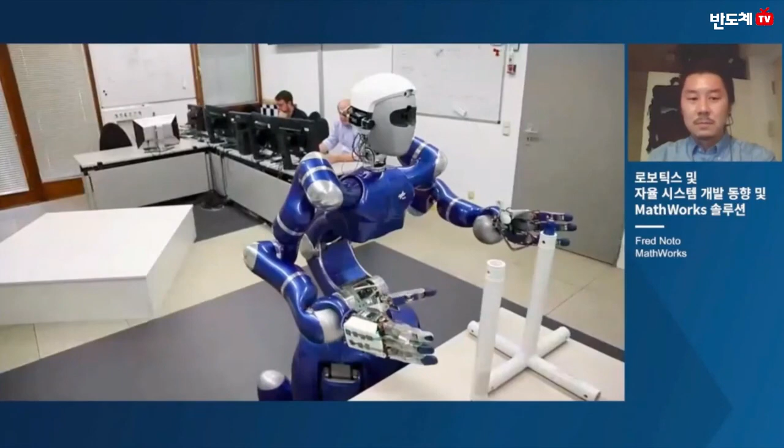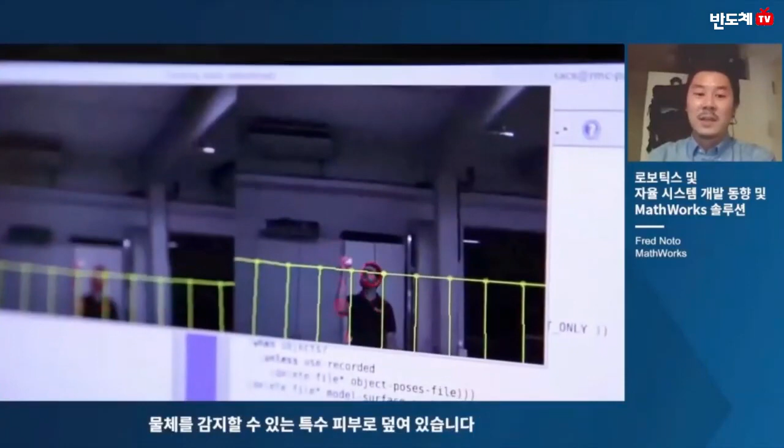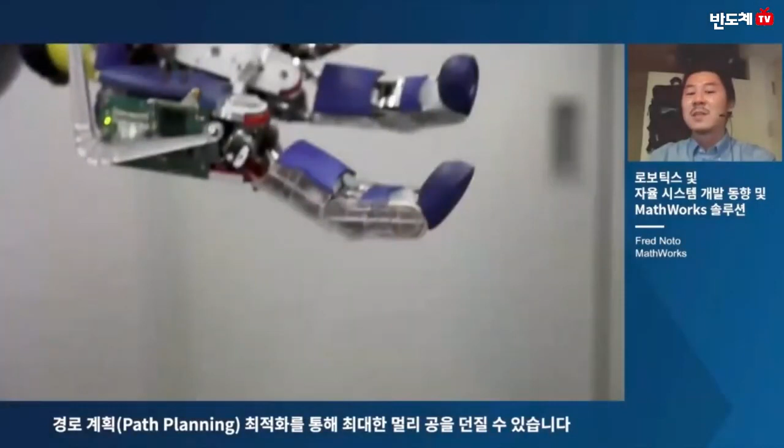I want to begin by showing an example of a highly advanced humanoid robot. This is Agile Justin, an autonomous humanoid robot developed at DLR, the German Aerospace Research Center. He uses stereo vision cameras to see the world and has special skin that can sense objects. Agile Justin can form a point cloud of the room, such as the table and the pipes, then perform human-like tasks such as connecting the pipes. He can perceive objects such as a person or a thrown ball, and he then plans his tasks such as catching or throwing a ball. Optimization methods for path planning enable him to throw the ball as far as possible.

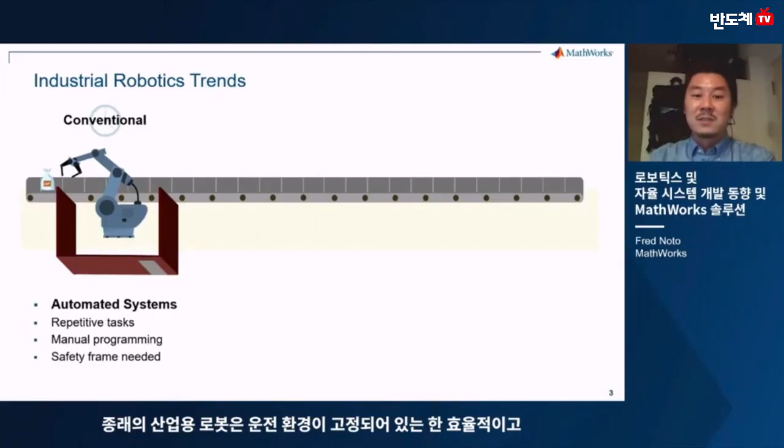So this was a case of a very advanced robot. Now let's take a step back and look at the trends toward intelligent industrial robots. Until now, conventional industrial robots have been mainly used, and these robots can be considered automated systems. They execute repetitive tasks throughout the day and night, and the tasks are manually programmed. They're unaware of their surroundings when in operation, so a safety frame is needed to prevent injuries or destroying objects. The conventional industrial robot is efficient as long as operating environments are fixed, which makes them effective for executing mundane tasks for prolonged periods.

There are many cases of our customers developing these robotic systems. One example is from Ricoh, who used model-based design to design robot actuators, a double motor actuator, which is multi-component and nonlinear. They use physical modeling tools to import 3D CAD data and build high-fidelity models of the complex system. Ricoh engineers were able to build the model in half a day and virtually reproduce the actual hardware characteristics in simulation.

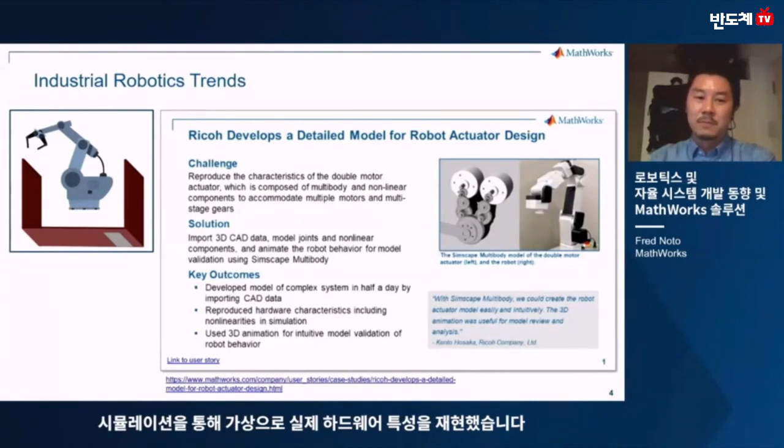In addition is a use case from 3T, who developed a robot emergency braking system for a SCARA assembly using model-based design. They used fixed-point implementations of control algorithms onto FPGA by automatically generating VHDL code. They were able to reduce clean room time from weeks to days, and noted that the time for resolving complex bugs was reduced from weeks and months to only one day.

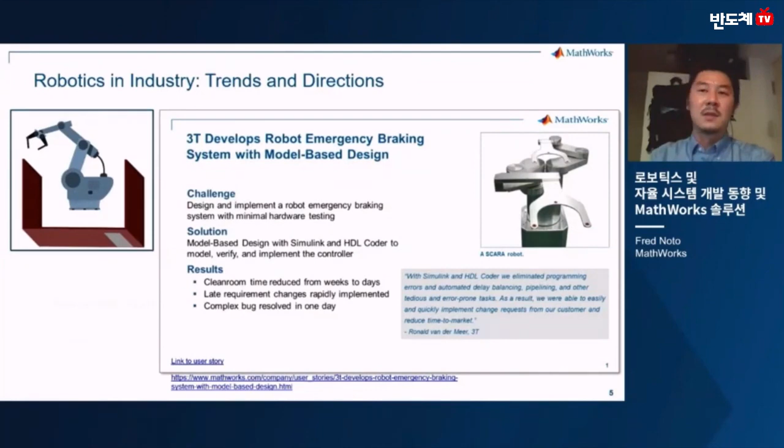Getting back to the trends, in recent days there are various autonomous technologies being applied to industrial robots. This includes algorithms that allow the robots to be more flexible in their execution, and also advanced algorithms that allow the robot to decide on the task being performed. Also, collaborative robots are robots that work while interacting with humans, and are rapidly being developed and adopted due to their agility in adapting to changing work environments.

A recent example of customers developing autonomous technologies with MATLAB and Simulink is from Kyocera, who presented at the MATLAB Expo in Japan last year. They used MATLAB, Simulink, additional toolboxes, and MathWorks consulting services to develop grasping and motion planning applications for collaborative robots. Simscape Multibody was used to build physical models for the robot hand, which were used for detailed modeling and simulation to define optimal parameters to successfully grasp various work pieces. They imported the robot model from URDF files using Robotics System Toolbox, which provided capabilities to interface with ROS. Though the slides are in Japanese, they are available to view on the MathWorks site.

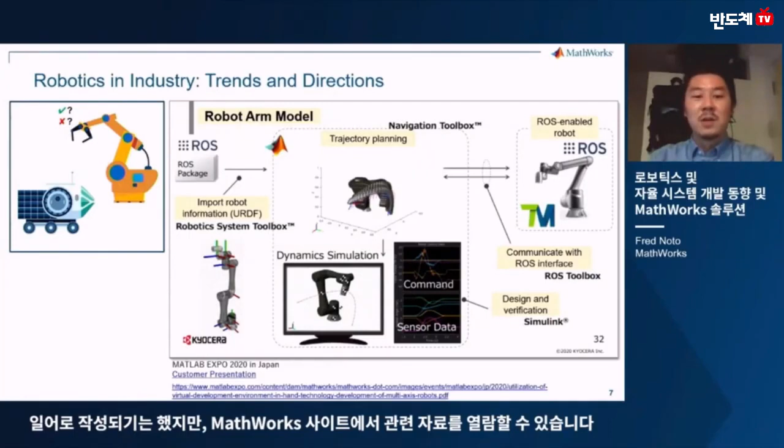Now let's take a step forward. Currently, there is a lot of research and development being done for autonomous systems, and these autonomous systems will be largely utilized in future commercial industries. These autonomous systems will be more agile and adapt to complex environments. More complex robots, such as mobile manipulators and humanoids, may become more relevant in the future. These robots will not only be able to execute a large variety of tasks autonomously, but will also cooperate and share intelligence, in other words data, to optimize and achieve an objective.

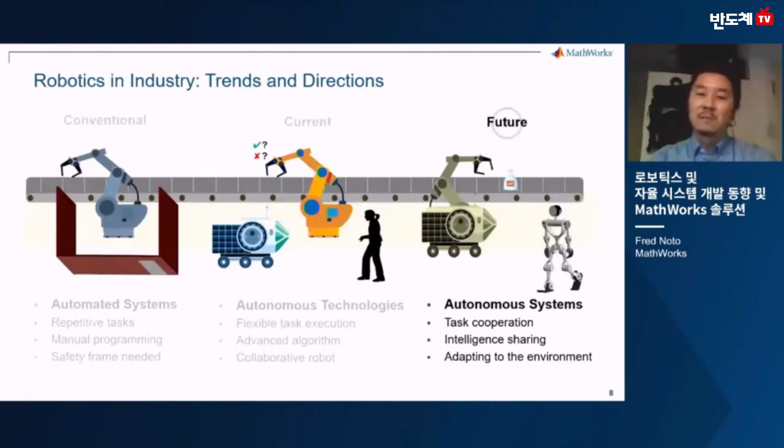An example of complex autonomous robot development with MATLAB and Simulink is again Agile Justin, from the video shown at the beginning of this session. Agile Justin, developed by DLR, the German Aerospace Center, is a humanoid robot with 53 degrees of freedom, and model-based design with MATLAB and Simulink was used in its development. MATLAB and Simulink was used to develop the advanced control, sensor calibration, and path planning algorithms, and Stateflow was used to design task sequences such as for grasping or lifting objects.

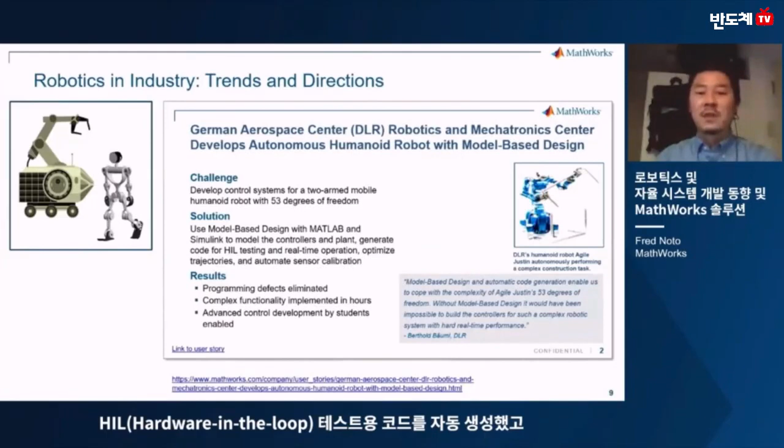They automatically generated code for HIL, or hardware in the loop testing, and the code was also used for real-time operations. Model-based design helped drastically reduce the time for implementing complex functionality, while automatic code generation eliminated manual coding errors and allowed the team to focus on designing their complex systems.

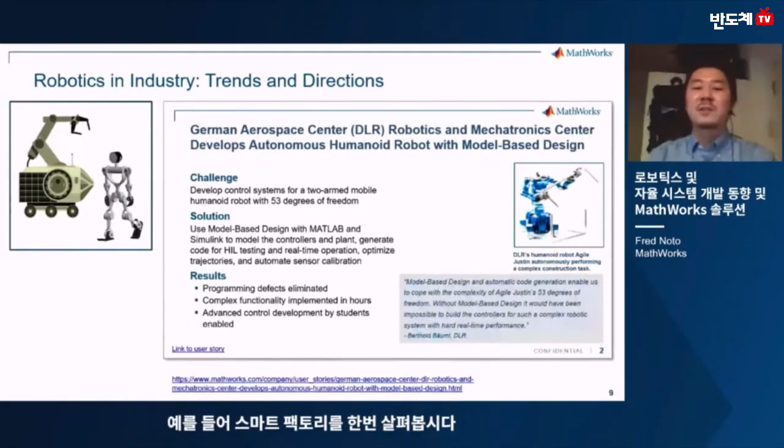Now, we discussed the trends in research and development for industrial robots, but in the bigger picture, robots are a portion of the operational process. For example, let's take a look at a smart factory. In a smart factory, the robots are on the factory floor executing tasks, potentially in collaboration with human workers.

And of course, the data from the robots must be collected, and there is a move towards using local 5G for connectivity and data collection, and this is being researched currently.

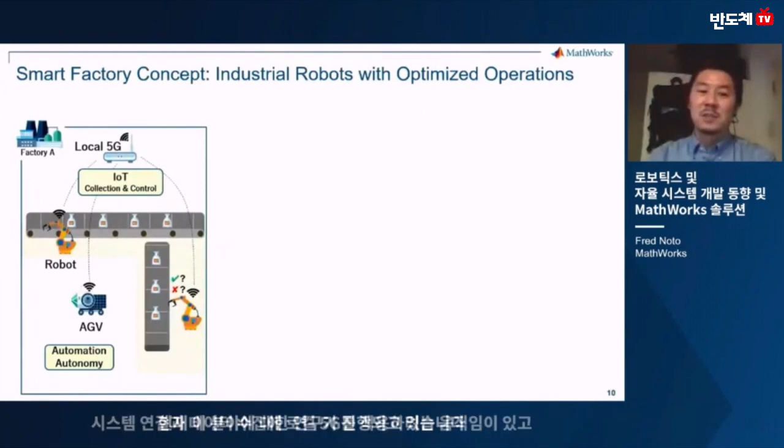The data is then sent to the cloud where AI is used to analyze the big data for predictive maintenance or identifying possible process optimizations. There is, of course, a human on the loop which monitors the operational data through OT systems and provides updates as necessary. Now, this is for one factory, but multiple factories will share data in the future, leading to more data collection and opportunities for improved efficiency.

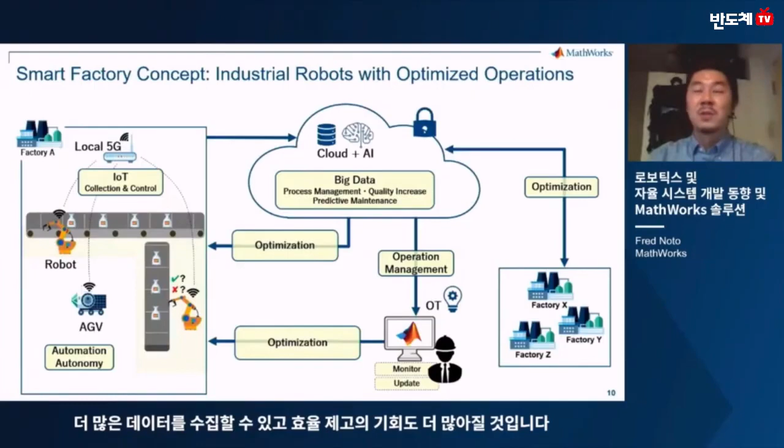Now, MathWorks customers are already developing systems that support this vision. For predictive maintenance, Mondi used MATLAB to develop and deploy operation monitoring and predictive maintenance software, which includes machine learning and allows Mondi to predict machine failures before they occur.

Only 6 months were needed to prototype the system, and the production software runs 24 hours a day, 7 days a week, saving more than 50,000 euros a year.

Krones developed a digital twin of their package handling robot using Simulink and Simscape Multibody for physical modeling. The digital twin model is used for design optimization, fault testing, and predictive maintenance.

Our customers are using MATLAB and Simulink in such ways for developing new robots as well as operational applications.

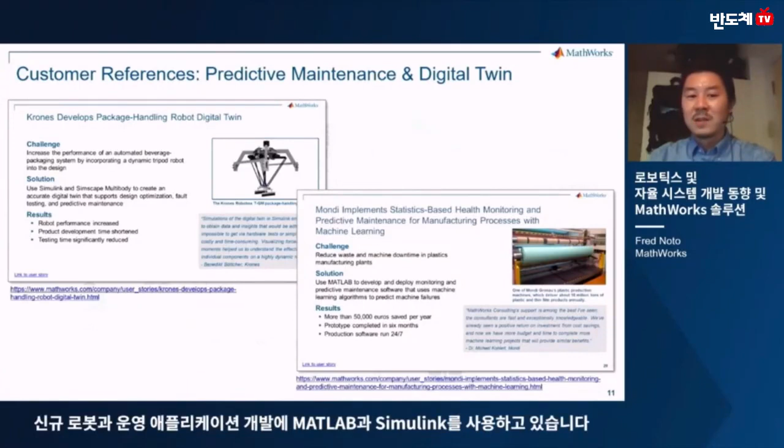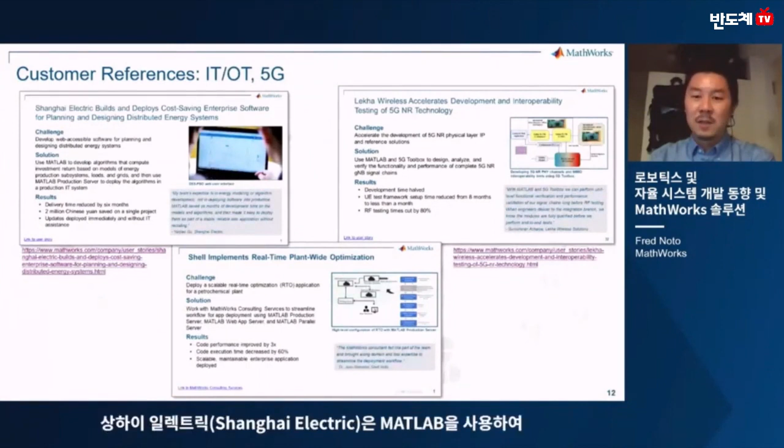On the topics of IT, OT, and 5G, Shanghai Electric used MATLAB to develop algorithms for distributed energy systems and used MATLAB production server to deploy in a production IT system.

Shell used MATLAB to implement a real-time plant-wide optimization application for a petrochemical plant and worked with MathWorks consulting services to deploy a high-performance application.

And finally, Lekha Wireless used MATLAB and the 5G toolbox to develop 5G new radio technology, which will enable data rates 10 times faster than LTE, while ensuring that they comply with specifications.

You can see that MATLAB and Simulink is used for developing a broad range of new technologies.

Now, I want to come back to the autonomous robots and give a simple overview of the development workflow. This will be a brief introduction to some applicable capabilities, but today's upcoming sessions will go into more detail for many of the topics.

When building autonomous robots, it's difficult and oftentimes high risk to build and test directly with hardware. So engineers ask the questions: how can I model and simulate robots? How can I design autonomous algorithms? And how can I perform integrated tests and deploy to hardware?

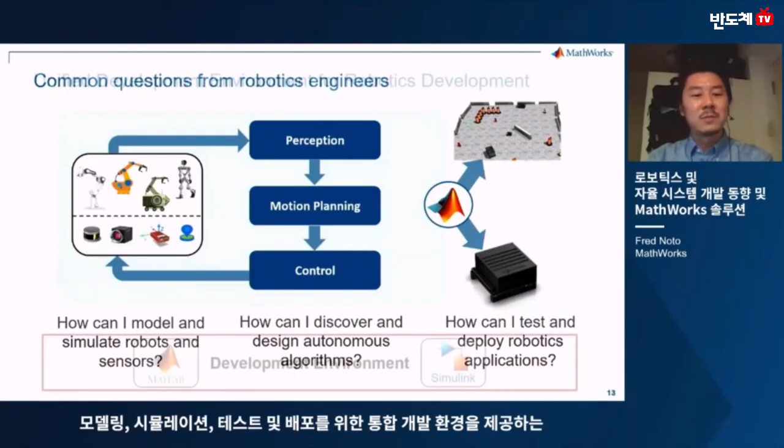Well, you could do this with MATLAB and Simulink, which provides a unified development environment for modeling, simulation, testing, and deployment.

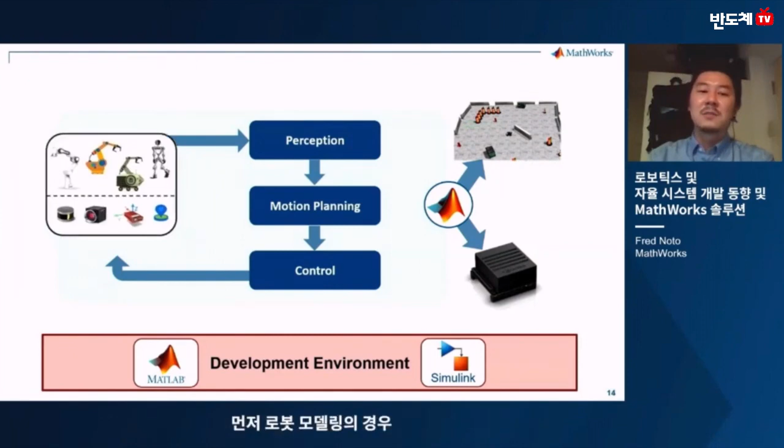Let's first look at robot modeling. MATLAB and Simulink provides capabilities to model and simulate your robots at the fidelity level you require.

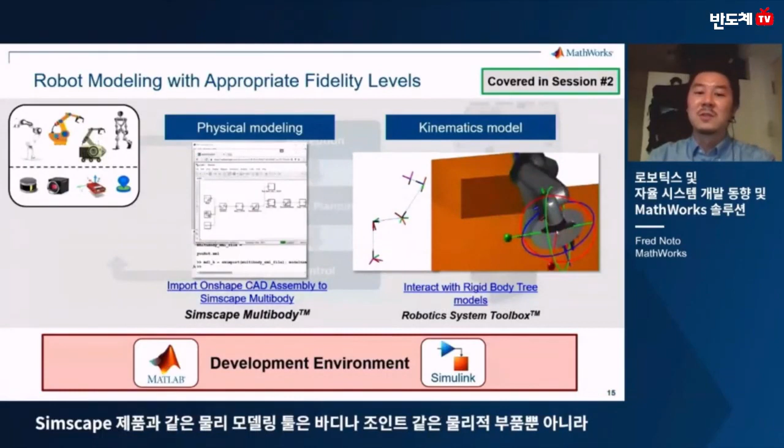For example, developing brand new robotic systems, you may be interested in the mechanical and electrical components that make up the robot. Physical modeling tools such as Simscape products help design your systems using physical components such as bodies and joints, as well as various motor types. You can even import from CAD files to accelerate this process.

If you're focused more on autonomy, you may not need an extremely detailed robot model. You can use kinematics models such as rigid body trees through Robotics System Toolbox. These models allow for faster setup and performance while you focus on developing autonomous algorithms. This topic will be covered in more detail in the next section today.

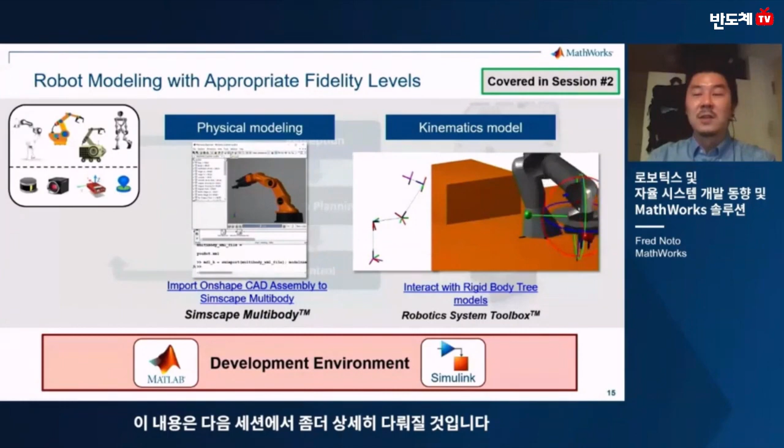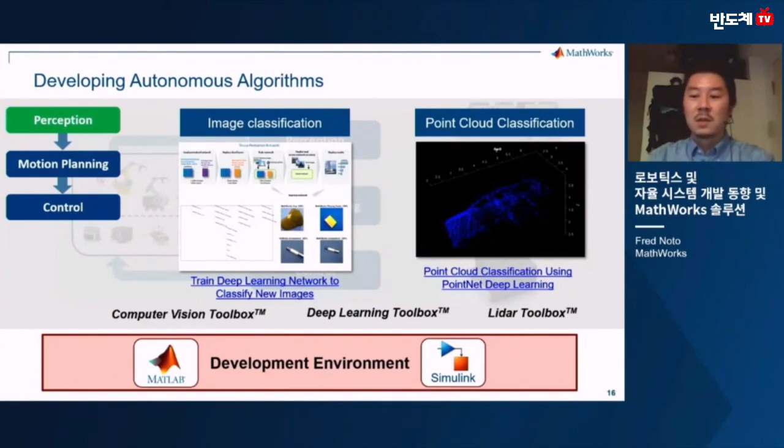For motion planning, industrial robots need to calculate their movements to perform a specific task. To grasp an object, a path is planned, and the robot configuration is calculated to achieve a desired end effector position. Robotics System Toolbox and Navigation Toolbox can be used for motion planning algorithms through forward and inverse kinematics and dynamics, advanced path planners, and even collision checking and detection capabilities.

This will be covered in more detail in session 3 today.

Then, of course, control is needed for execution. For complex applications, scheduling sequences of tasks is often necessary. You can build state transition diagrams or sequence logic using Stateflow. Model predictive control can be applied to generate collision-free trajectories.

And recently, there has been an increase in research and development for the application of reinforcement learning for robot controllers. This will be the topic of focus in session 4 today.

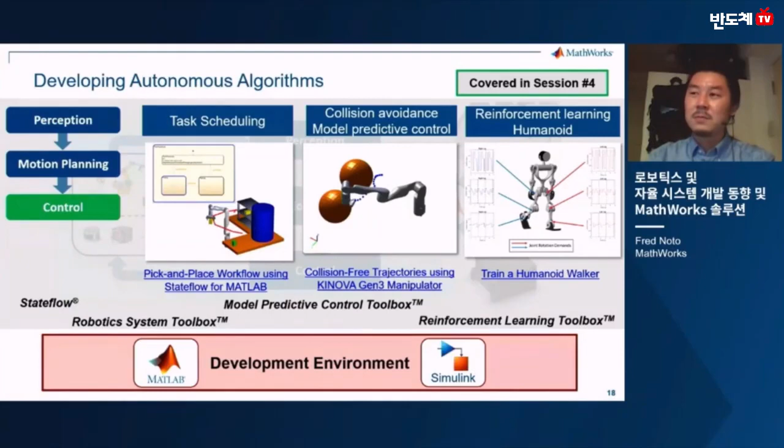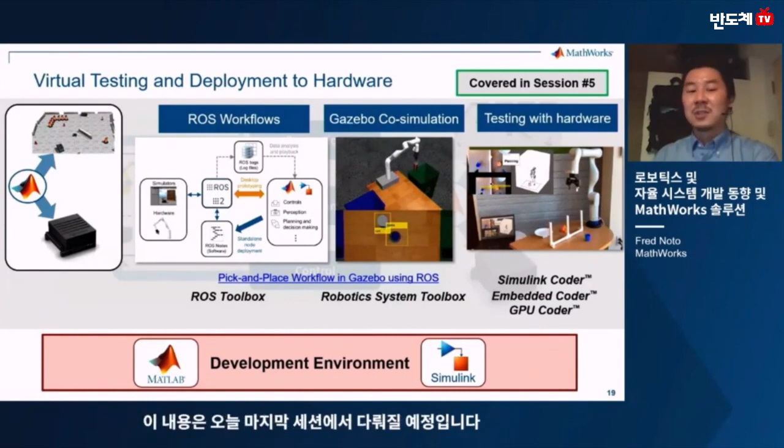So that was a brief introduction to the workflow for developing autonomous industrial robots. You can use model-based design with MATLAB and Simulink to model and simulate robots, develop autonomous algorithms from perception, motion planning to controls, integrate these components together, and test virtually, and finally, automatically generate the necessary code to deploy to your hardware.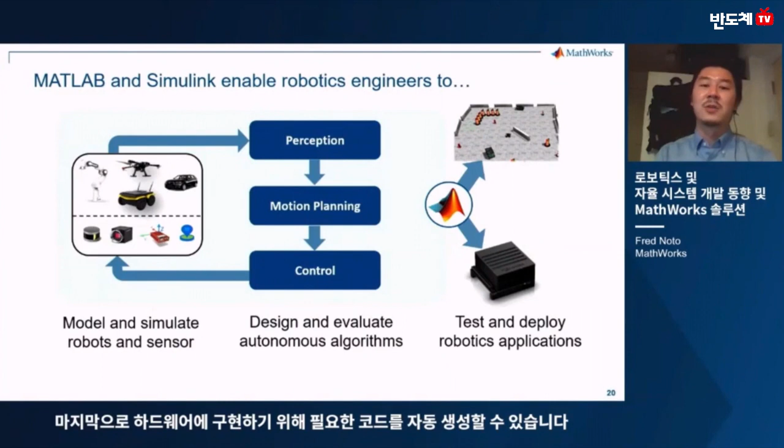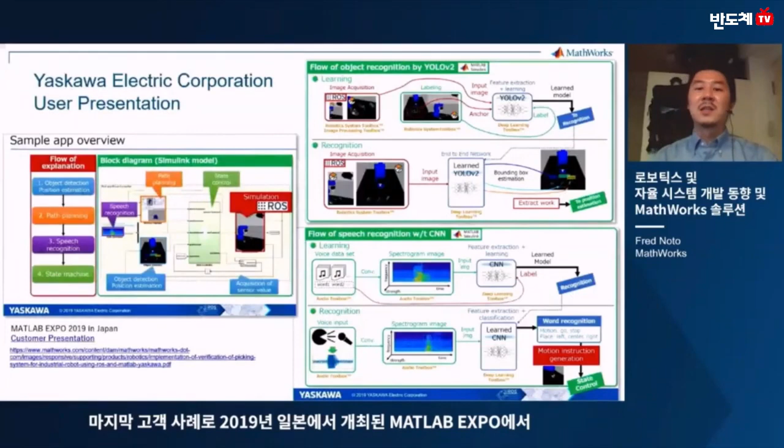As a final use case, I want to share a customer presentation by Yaskawa Electric Corporation from the 2019 MATLAB Expo in Japan. This was for developing a sample application for autonomous manipulator operations.

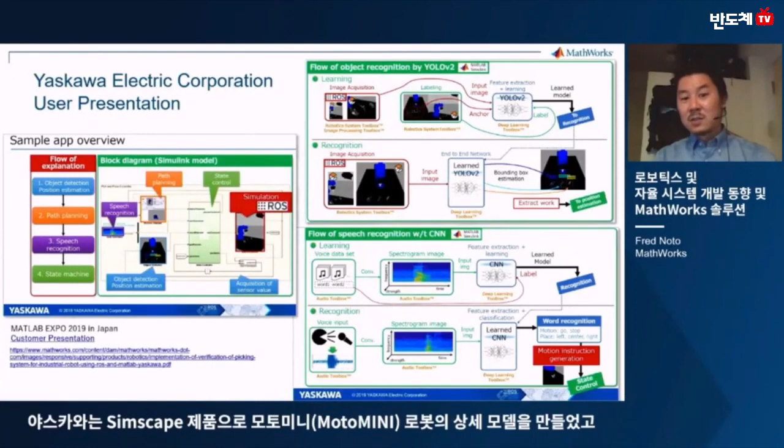A detailed model of Yaskawa's Moto Mini robot was created using Simscape products, and with this, they can optimize parameters such as for torque costs.

An object recognition algorithm was also designed based on YOLO v2, which identifies different workpieces using deep learning while calculating their locations as well. Motion planning was done using Robotics System Toolbox and rigid body trees built from importing URDF files.

A speech recognition algorithm, which uses deep learning to understand voice commands, was also included in this project. MATLAB and Simulink was interfaced to Gazebo simulators through ROS Toolbox, allowing for simulations with virtual sensors.

In this case, MathWorks products helped in developing various components for this autonomous robot application.

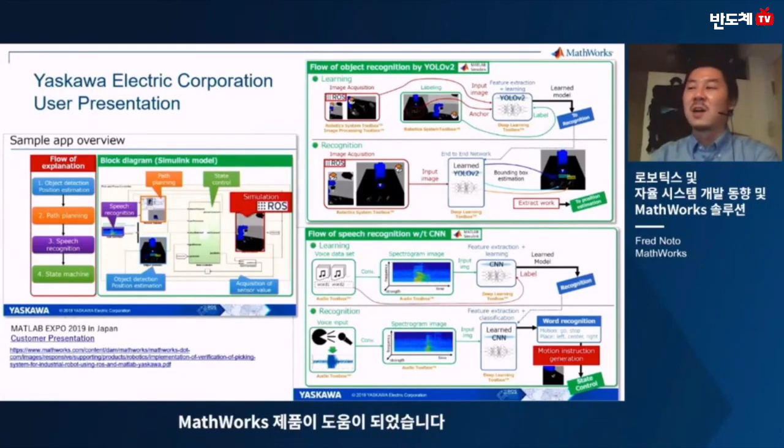Now, as discussed, there are various technologies which make up an autonomous robot. MATLAB and Simulink are the base tools for development, but a variety of optional products are available for developing different types of robots. I briefly introduced some of these tools applicable to industrial robots, such as Robotics System Toolbox and Navigation Toolbox. Also tools for perception, such as Computer Vision Toolbox and LiDAR Toolbox, and other toolboxes as well.

Simply put, MathWorks offers tools and capabilities that specifically address the needs for your projects, whether it be manipulators, mobile robots, UAVs, or self-driving cars.

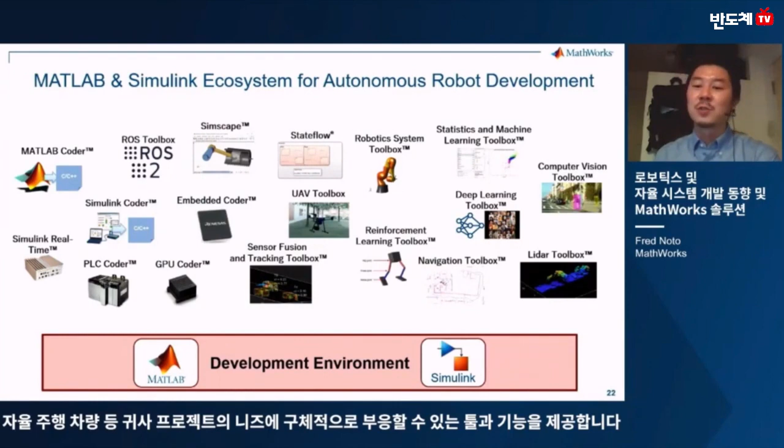As complex robotics become more broadly developed and adopted, MATLAB and Simulink provide a unified environment which allows integrated workflows for developing new robots and their autonomous technologies, not only for simulation, but also allows deployment to hardware as well.

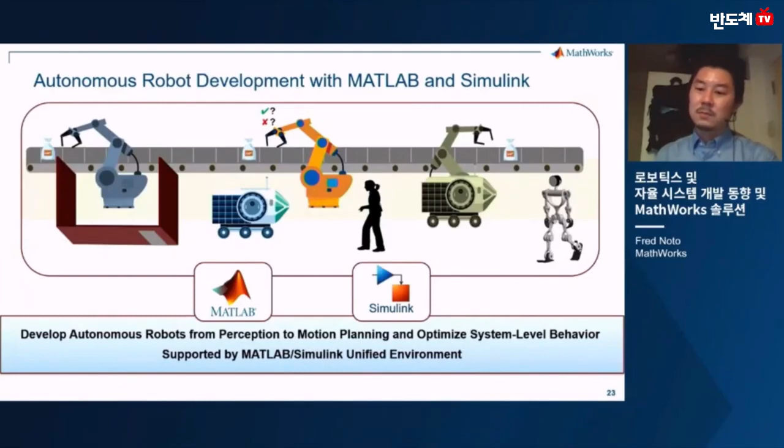I want to finish with some key takeaways for this session. First, autonomous technologies are rapidly being adopted in industrial robots, and this will be accelerated in the future.

And MATLAB and Simulink provide an ecosystem of trusted tools that support developing autonomous robots, from modeling and simulation of complex multi-domain systems, developing autonomous algorithms from perception to controls,

designing advanced and optimized controls, testing integrated systems virtually and then automatically generating code for hardware deployment. And you can also connect MATLAB and Simulink to the ROS middleware, your ROS networks here.

As autonomous robots become more complex, so does the process of developing safe and robust systems. But MathWorks can support you with integrated solutions and technical services to develop and adopt autonomous systems.